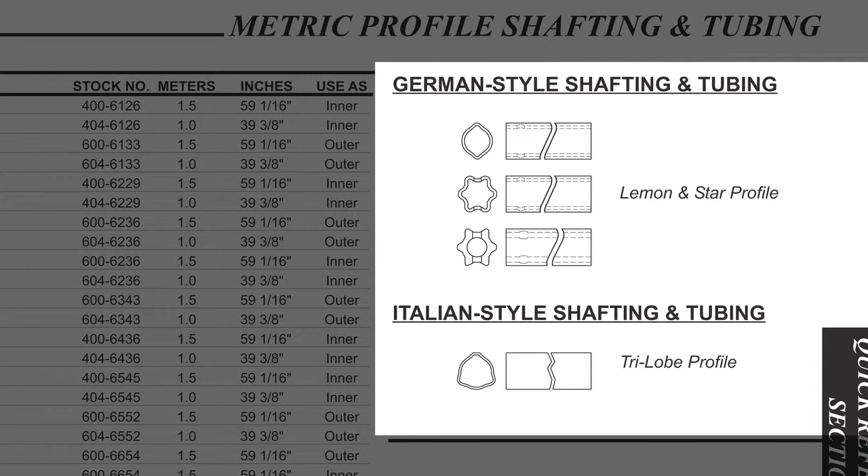If you look at page 11 in the catalog, you'll see the metric shapes. I'm going to take a shaft, and this is the easiest, most foolproof way to know you have a metric shaft - pull it apart.

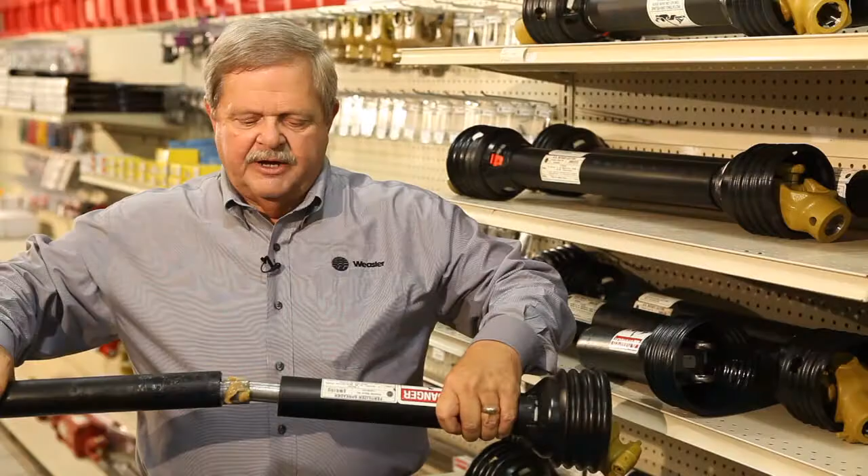As you can see, you have a tri-lobe shaft in the middle, which is going to be the Italian metric. If a customer came in and we measured that shaft and found it was tri-lobe in the middle, we would turn to page 11 and find that shape, which looks just exactly like this - the tri-lobe.

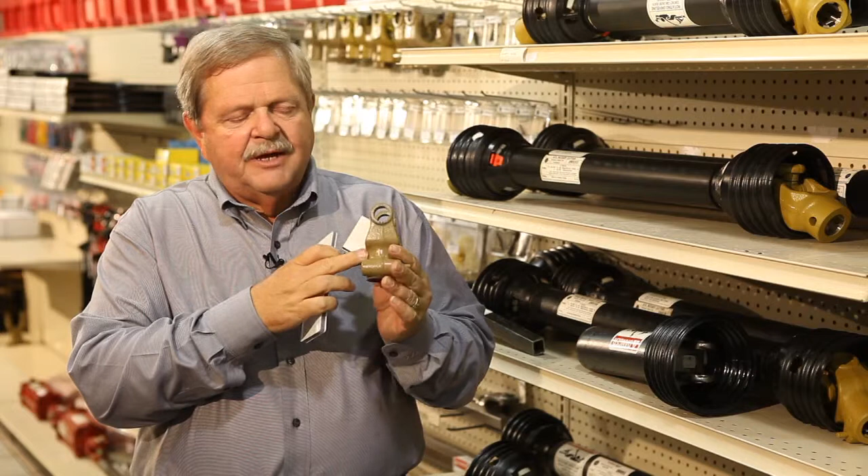So if he walks in with this, we measure with the metric transparency system, which is yellow. The metric, if it comes from us, is always going to be a mustard yellow - the tag and the ends of the shaft are mustard yellow. So you want to use this transparency to identify it.

It's a little harder because you have to know two numbers on metric, since the same hole size can be two different widths. So on metric, I'm going to turn to the transparency ID system and measure the hole size - these two right here are pretty close.

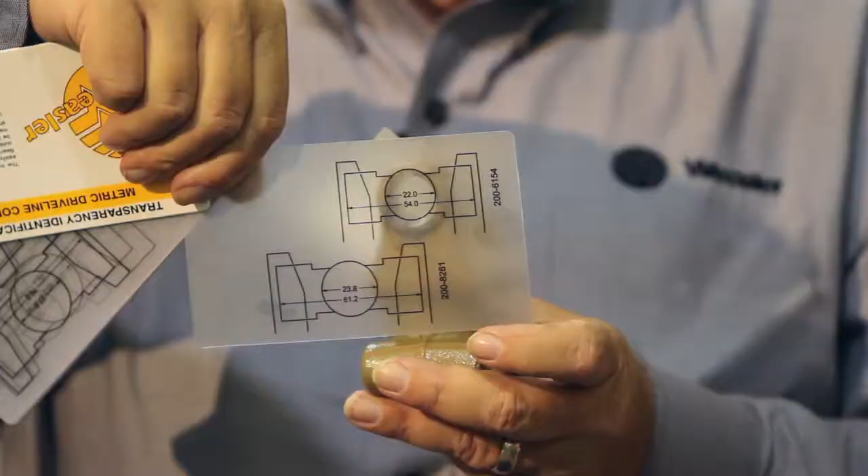But you can see one of them is 22 millimeters - the hole is 22 millimeters, and it's actually 54 millimeters wide. So when I check the hole and then check the ears, this one shows up perfect.

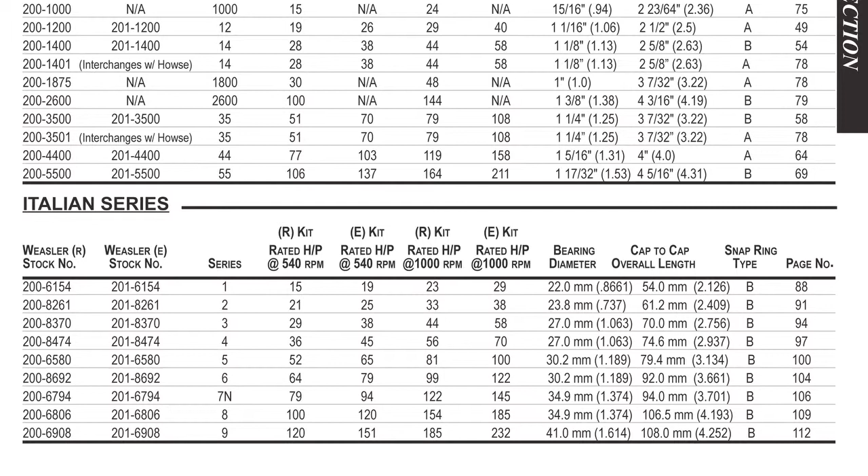If I turn back to page 9 and look at it, the very top item on the Italian metric series is going to be a series 1. When you go across and down the bearing diameter, you're going to find 22 millimeters and 54 millimeters.

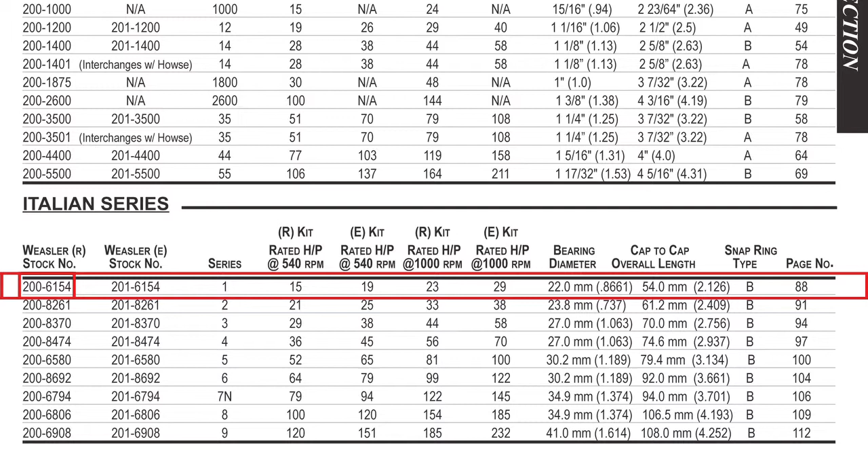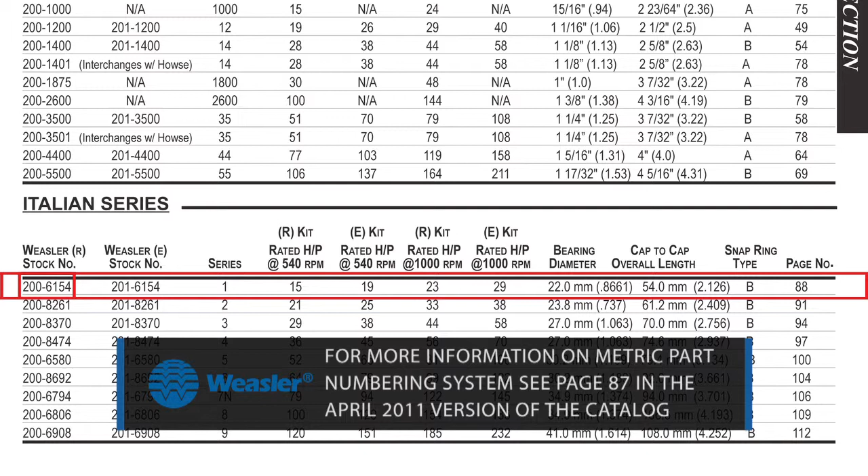Going all the way over to the left, it tells you the part number is 200-6154. Remember, I told you all part numbers mean something - 200 is a cross kit, the 6 means it's a Bondioli, the 1 means it's a 1 series, and the 54 is 54 millimeters wide.

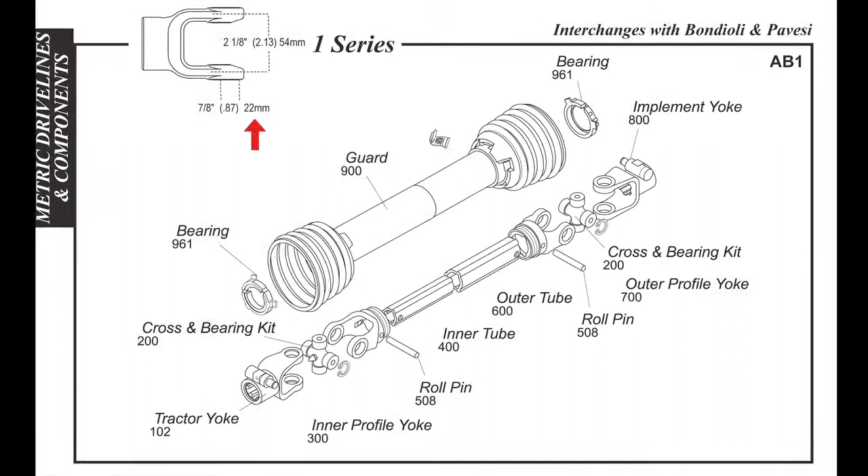What you can do is turn to page 88 in the catalog, and you'll see in the picture drawn up there the most typical use, including the tri-lobe shafting. So what we've done now is narrowed our search from the whole world down to 3 pages.

Show this to your customer, let them pick out the broken part and replace it. It's just that simple - make sure it's metric, measure it, go to page 9 and follow it to whichever page it says, in this case 88, pick out the broken part, and you're done.